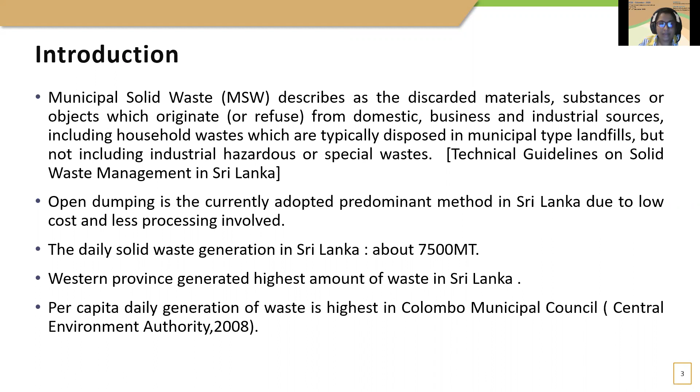Introduction. Municipal solid waste describes the discarded materials, substances, or objects which originate from domestic, business, and industrial sources, including household waste, which are typically disposed in municipal type landfills. In Sri Lanka, open dumping is the currently adopted method due to low cost and less processing involved. Recently, municipal solid waste management became a growing concern in Sri Lanka with the catastrophic landfill failure that occurred at Meethotamulla.

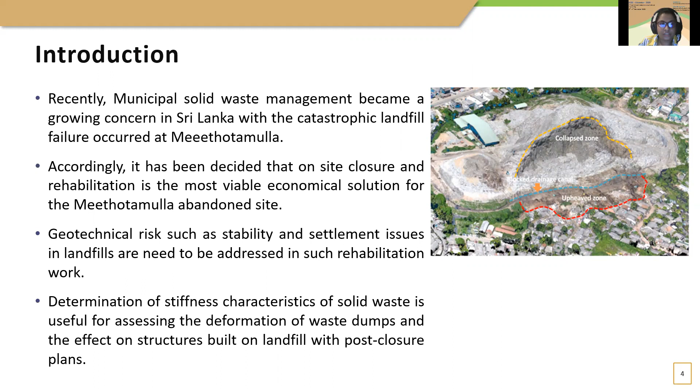Accordingly, it has been decided that on-site closure and rehabilitation is the most viable economical solution for the Meethotamulla abandoned site. In such rehabilitation work, geotechnical risks such as stability and settlement issues in the landfill need to be addressed. Determination of stiffness characteristics of solid waste is useful for assessing the deformation of the waste dump and the effect on structures built on the landfill with a post-closure plan. However, relevant studies for landfills in Sri Lanka are very limited.

Methodology. By considering the facts identified through literature, a laboratory test program was conducted to study the consolidation behavior of MSW. Consolidation tests for MSW are performed using the Rowe cell. As the size of the Rowe cell sample is larger than the oedometer sample, it can accommodate a more representative sample. Based on experimental data, compressibility characteristics of municipal solid waste were determined. Accordingly, the possibility of improving the MSW characteristics by preloading was assessed.

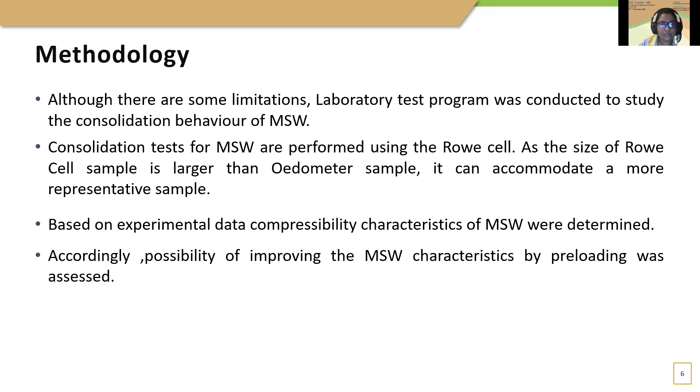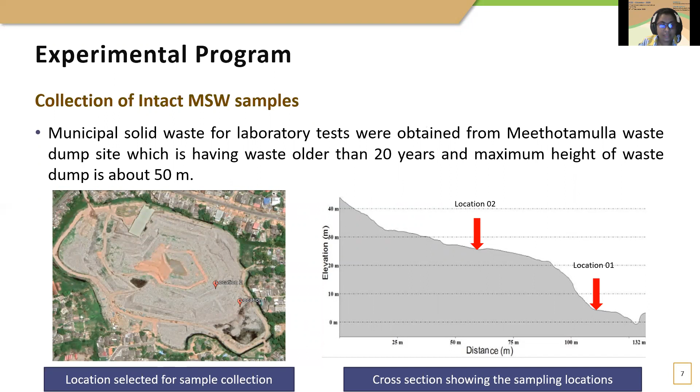Experimental program. For this study, samples were obtained from the waste dump site at Meethotamulla. Samples representing 2 degradation levels were collected. These samples are more than 20 years old and primary biodegradation is completed. One sample is obtained from the bottom of the waste dump and the second sample is from the middle part of the waste dump. In order to identify the composition of the waste sample, the waste classification framework proposed by Dixon and Langer is used in the study based on its relevancy to the nature of municipal solid waste in Sri Lanka.

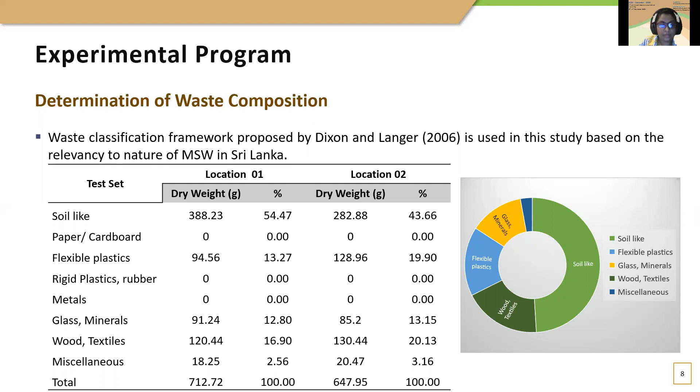In both locations, identifiable paper, cardboard, or any other organic materials were not encountered. Hence, it can be concluded that all degradable components were fully degraded. As shown in the graph, location 1 contains more degraded materials and location 2 contains more polythene and textile. For experimental works, a Rowe cell with diameter of 151.2 mm was used. At the latter part of the experimental program, a few defects were encountered in the large Rowe cell. Therefore, a Rowe cell with diameter of 75.7 mm was used for one test series.

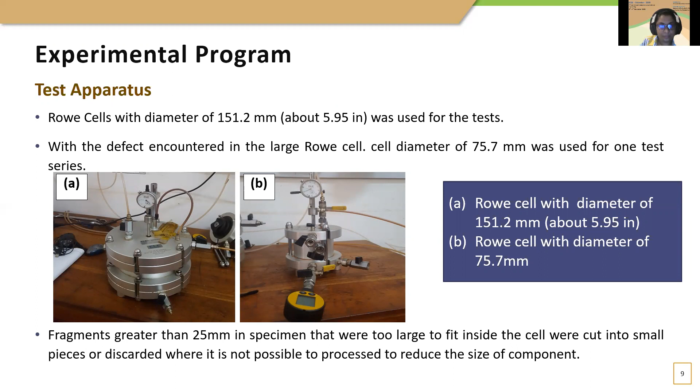In sample preparation, fragments greater than 25 mm in the specimen that were too large to fit inside the cell were cut into small pieces, and discarded where it is not possible to reduce the size of the component. For the experimental works, recompacted samples were used. Samples were prepared inside the Rowe cell to a similar bulk density to that obtained from the field test. Two tests were conducted for each sample, one under saturated condition and the other under unsaturated condition. In the preparation of the saturated sample, attempts were made to achieve full saturation by adding water to the sample.

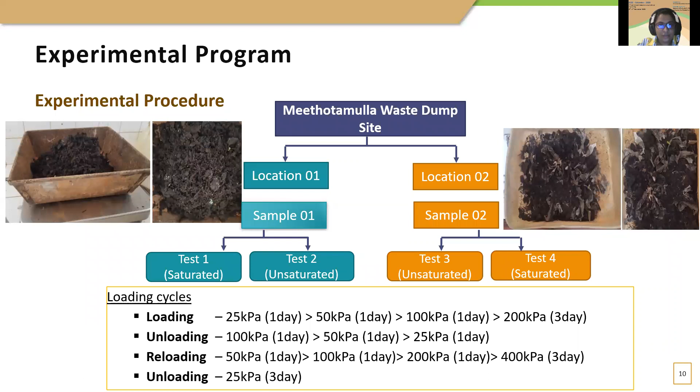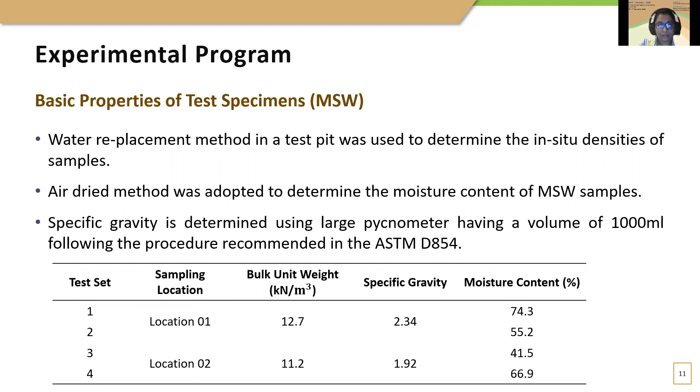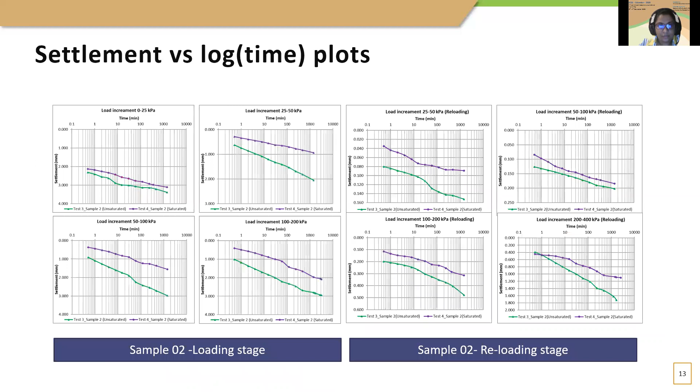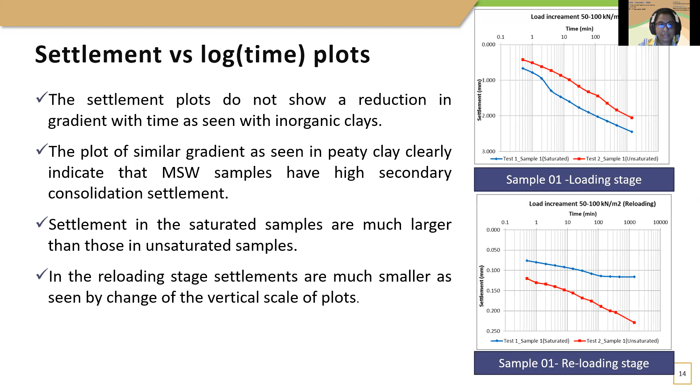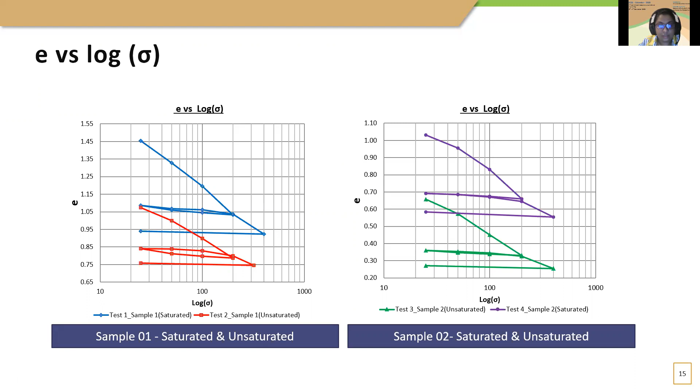As shown in this graph, the settlement plots do not show a reduction in gradient with time as seen with inorganic clays. The plot of similar gradient as seen in peaty clay clearly indicates that MSW samples have high secondary consolidation settlement. In the reloading stage, settlements are much smaller, as seen by the change of the vertical scale of the plot. Then e versus log sigma curves were developed, and they show a similar pattern to the e versus log sigma curves for intact or engineering soil.

Variation of volume compressibility for reloading and loading stages is shown in this graph. Continuous lines represent the loading stages and dotted lines are for reloading stages. As shown in this graph, mv values of all samples decrease as the effective stress increases. mv values of unsaturated samples are less than the values of saturated samples.

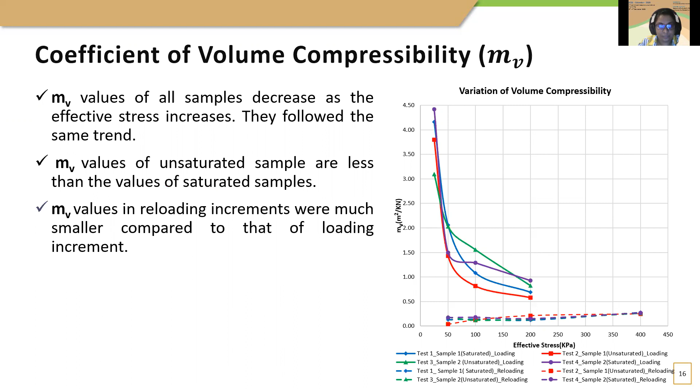Also, the variation of secondary consolidation with respect to each stress level was plotted. The C alpha values of unsaturated and saturated samples were of the same order. The C alpha in reloading increments was much smaller compared to that of loading increments. Hence, it confirms that the secondary consolidation characteristic of municipal solid waste can be significantly improved by preloading. Even though MSW has high secondary consolidation, the magnitude of the secondary consolidation coefficients is lower than that of peaty clay.

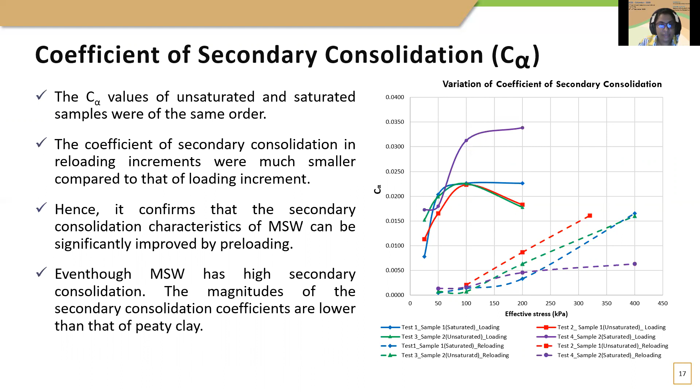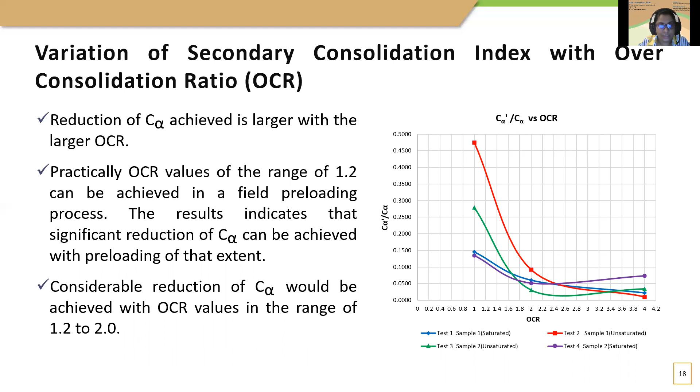Further, the secondary consolidation index with respect to OCR is plotted, and it can be seen that the reduction of C alpha achieved is larger with larger OCR. Practically, an OCR value in the range of 1.2 can be achieved in a field preloading process. The results indicate that significant reduction of C alpha can be achieved with preloading of that extent.

The next important parameter is the variation of coefficient of consolidation. For this, we have considered 4 curve fitting methods. As the settlement versus log time plots for waste samples have not followed the typical S shape, the transition from primary consolidation to secondary consolidation couldn't be identified clearly. Therefore, the log time method was omitted.

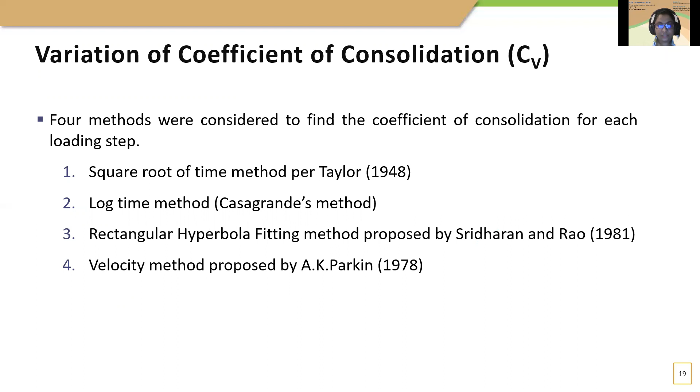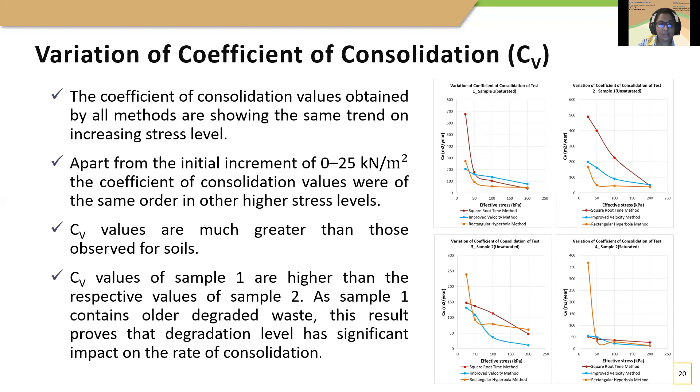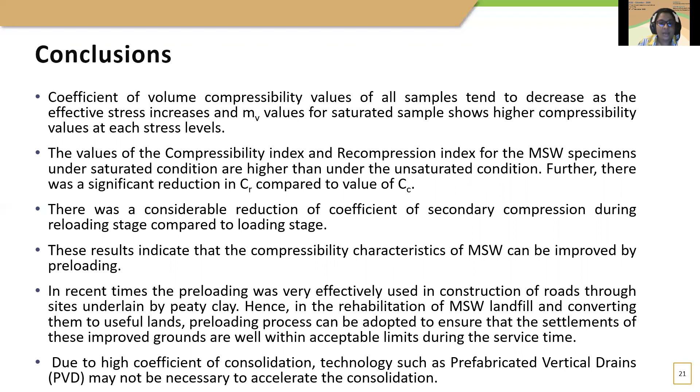In recent times, preloading was very effectively used in construction of roads through sites underlain by peat clay. Hence, in the rehabilitation of municipal solid waste landfills and converting them to useful lands, a preloading process can be adopted to ensure that the settlements of these improved grounds are well within acceptable limits during the service time. Due to the high coefficient of consolidation, technologies such as PVD may not be necessary to accelerate the consolidation. These are the references, and thank you for listening.